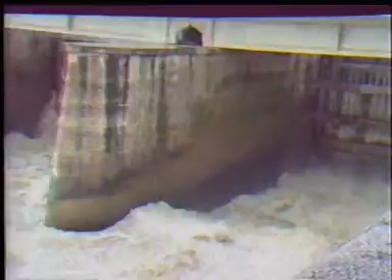Friends, today we are going to deal with the effect of viscosity on fluid flow, explain the basic concepts of laminar flow, turbulent flow, critical velocity, and Reynolds number, and its application in fluid flow problems.

All fluids existing in nature, both gases and liquids, are viscous and compressible. In the 18th century, scientists sought to specify the motion of fluids by mathematical relations. These relations could be developed only after certain simplifying assumptions were made. The fluid was assumed to be non-viscous and incompressible. Such a fluid, which in addition had no surface tension, was called an ideal fluid.

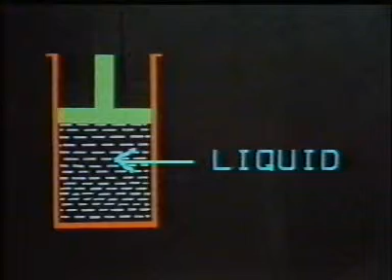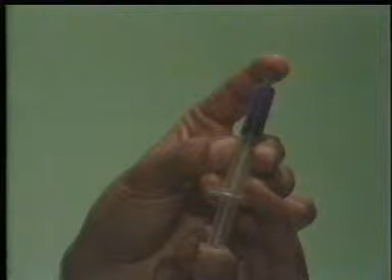Generally, liquids are said to be viscous but incompressible, whereas gases are said to be compressible, having low viscosity. For example, water is incompressible, but air is compressible. Viscosity causes shear stresses in moving fluids and hence loss of energy. All real fluids resist any force tending to cause one layer to move over another. This resistance to the movement of one layer of fluid over an adjacent one is due to the viscous nature of the fluid.

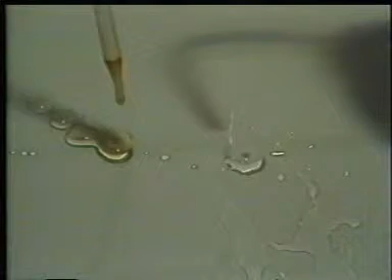Viscosity is therefore defined as the property of fluids by virtue of which fluids resist relative motion between adjacent layers. Without viscosity of fluid, there is no fluid resistance. Viscosity is greatly affected by temperature. Viscosity of liquids decreases with temperature, while that of gases increases with temperature. Consider this oil and water. The oil is more viscous than water.

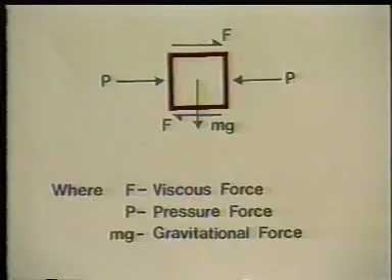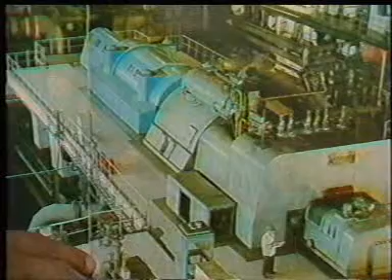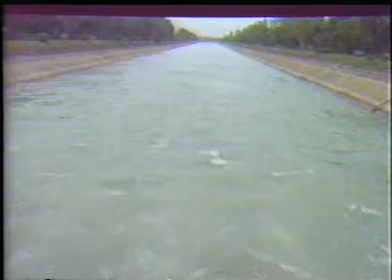A fluid particle in motion is subjected to viscous force, pressure force, and gravitational force. Viscous forces play an important part in many fluid flow problems, such as flow in conduits, flow through porous media, the problem of lubrication, design of turbines, water distribution systems, pipe network in chemical industry, irrigation canals, aircrafts, missiles, etc.

Till the middle of the 19th century, scientists and engineers obtained much information about the flow in pipes and open channels through observation and experimentation. This information was entirely empirical because practically nothing was then known about the laws governing the influence of viscosity. Osborne Reynolds was the first to introduce viscosity as one of the parameters in the analysis of fluid flow.

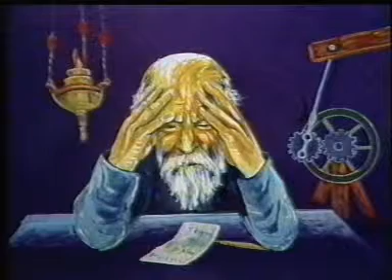Osborne Reynolds, 1842 to 1912, came of a clerical family in Belfast, and after workshop experience studied mathematics at Cambridge, where he graduated with honors. In 1868, he was appointed to the new chair of engineering at Owens College, which later became Victoria University in Manchester. He was elected a Fellow of the Royal Society in 1877, and he remained active at Manchester until his retirement due to failing health.

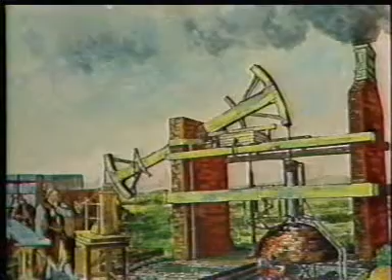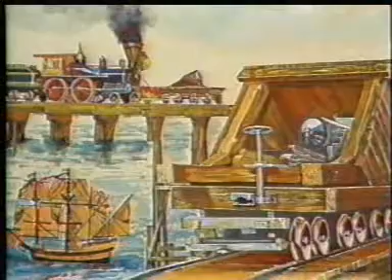Reynolds' interests were manifold, from problems in mechanics, thermodynamics and electricity, to problems in navigation, rolling friction, and steam engine performance. Reynolds' approach to the solution of problems was primarily that of an engineer.

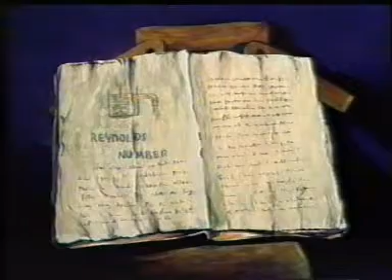While the existence of two types of flow, called laminar flow and turbulent flow, was known before Reynolds, he was the first to publish a paper in 1883 formulating a parameter to take into account the effect of viscosity. This parameter now bears his name and is called Reynolds number.

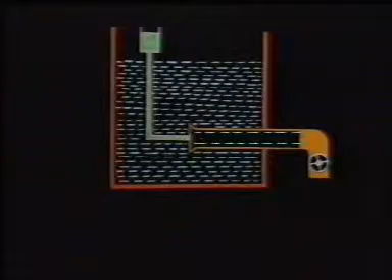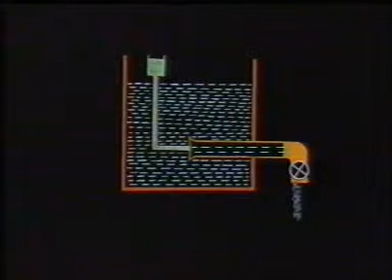The apparatus used by Reynolds for conducting experiments was basically as shown. Water from the tank could flow out along the glass tube at a rate controlled by a valve at the outlet end. A fine nozzle connected to a small container of a liquid dye is used to discharge a colored filament in the flowing liquid. If the velocity of water remained low, the filament of dye would pass down the tube without mixing with water. Such a flow was called laminar flow.

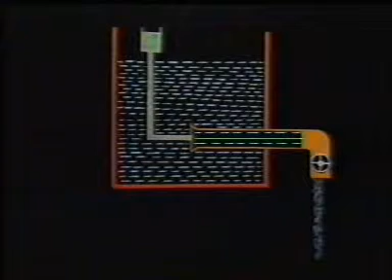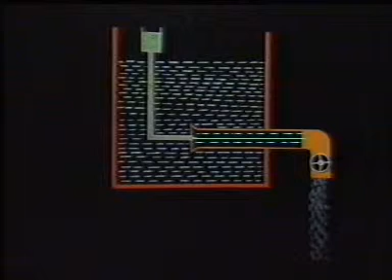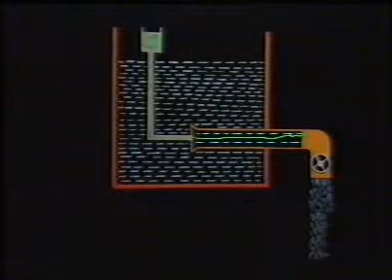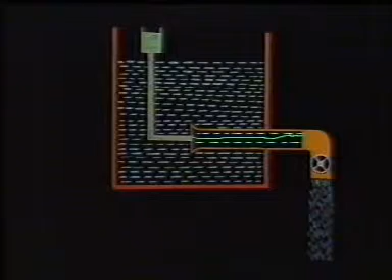As the velocity of water increased, this type of flow would persist until the velocity reached a value at which the stream of dye began to waver. Further increase in velocity of water made the fluctuation in the stream of dye more intense, particularly towards the outlet end of the tube, until a state was reached in which the dye no longer traveled the whole length of tube as a distinct, unbroken thread, but quite suddenly mixed more or less completely with water in the tube. Such a flow was called turbulent flow.

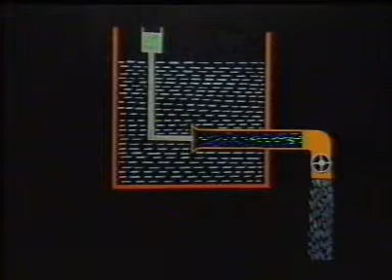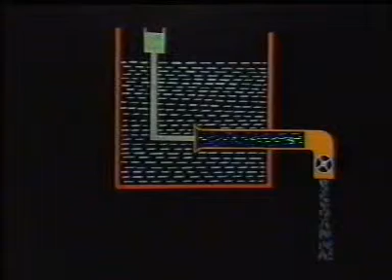Still further increase in velocity caused no alteration in the type of flow, but the dye mixed even more readily with water, and complete mixing was seen nearer the inlet end of the tube. Laminar flow, in which the dye remained as a distinct streak, could be restored by reducing the velocity. Although Reynolds used water in his original tests, subsequent experiments have shown that the phenomenon is exhibited by all fluids, gases as well as liquids. Moreover, these two types of flow can be found in all situations and are not confined to circular tubes alone.

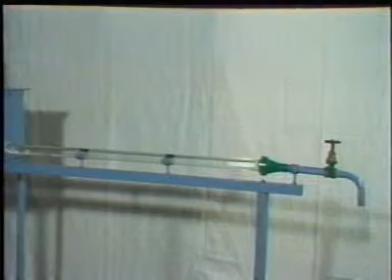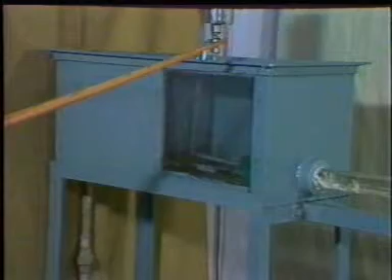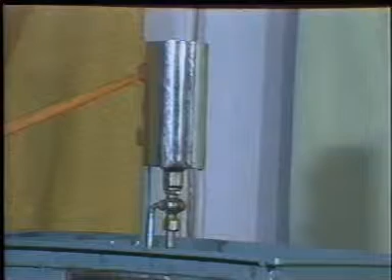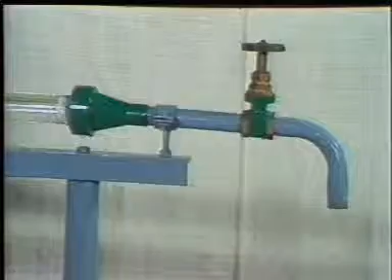Now, let's go to the hydraulics laboratory to demonstrate Reynolds' experiment. This apparatus is similar to the one used by Reynolds in his experiments. This is the tank containing water. The baffle plates reduce any disturbance in the water. This is the dye container, which injects a fine jet into the stream at the bell-mouthed entrance. The flow in the long glass tube is controlled by the outlet valve. To measure the discharge, from which velocity is computed, a measuring tank is used.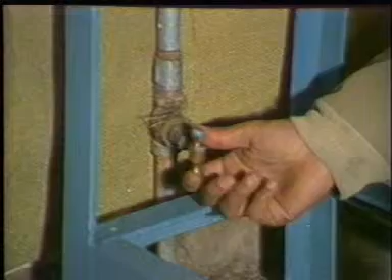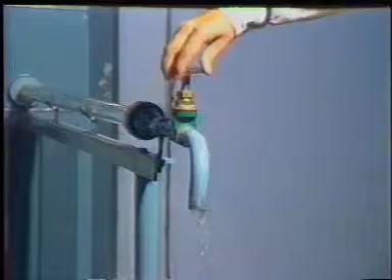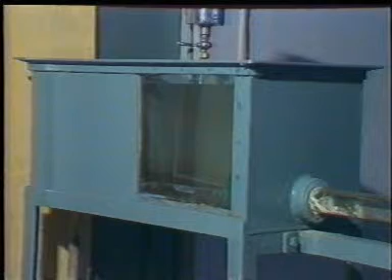The main supply valve is opened and the tank is filled with water, with the outlet of the glass tube partly open so that no air is entrapped in the glass tube. The outlet valve of the glass tube and the inlet valve of the tank are closed when the tank is full of water. Now, we wait for some time to allow water in the tank and the glass tube to come to rest.

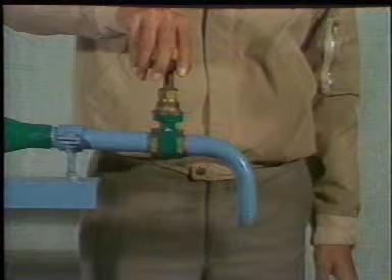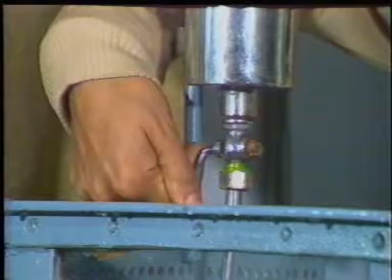Now open the outlet valve of the glass tube so that the velocity of flow is very small. Also open the dye injector so that the dye is admitted into the bell-mouthed entrance of the glass tube. We find that the dye appears as a straight line extending through the glass tube. This type of flow, in which fluid particles move in an orderly fashion, is called laminar flow or viscous flow

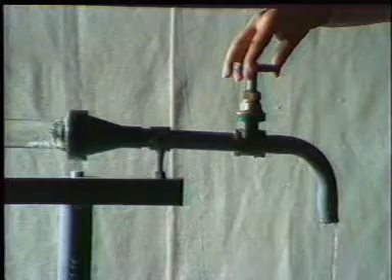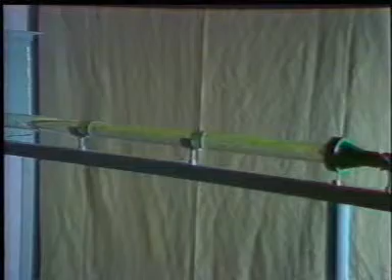or straight line flow. Let's increase the velocity of flow with the help of the regulating valve. We find that the liquid continues to flow in laminae until the velocity of flow reaches a value at which the stream of dye begins to waver towards the outlet end of the glass tube. Further increase in velocity of water increases the fluctuations in the stream of dye until the stream of dye gets mixed up completely with water in the tube. Still further increase in velocity of flow does not cause alteration in the type of flow.

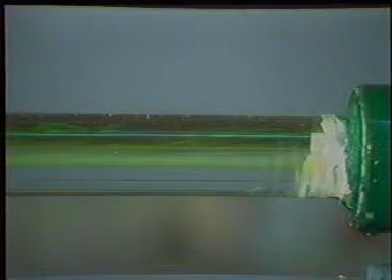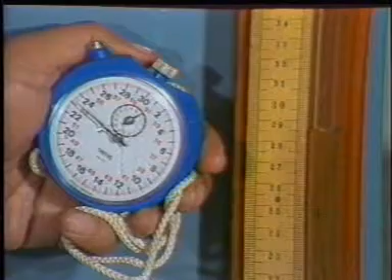In this type of flow, the paths of individual particles of fluid are no longer straight everywhere, but are sinuous, intertwining, and crossing each other in a disorderly manner, so that a thorough mixing of fluid takes place, and such a flow is called turbulent flow. Let us calculate the velocity of flow. Now, let us decrease the velocity of flow in the glass tube till the stream of dye is again visible in the glass tube.

We find that the velocity at which the change from laminar flow to turbulent flow occurs is higher than that which caused the change from turbulent to laminar flow. Reynolds called these velocities respectively the higher and lower critical velocities. Reynolds also found that the nature of flow, that is, whether laminar or turbulent, and its relative position along a scale, indicating the relative importance of turbulent to laminar tendencies, was indicated by a dimensionless parameter which is called Reynolds number.

This dimensionless parameter is given by: Reynolds number is equal to rho L V over mu, where rho is the mean density of fluid, L is a characteristic dimension of the stream. For example, in this case, L is the inside diameter of the pipe. V is the velocity of flow, and mu is the coefficient of dynamic viscosity of fluid.

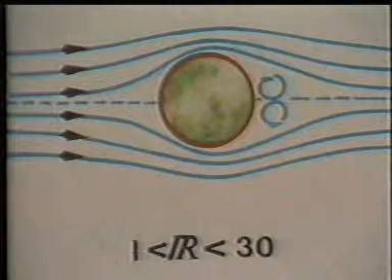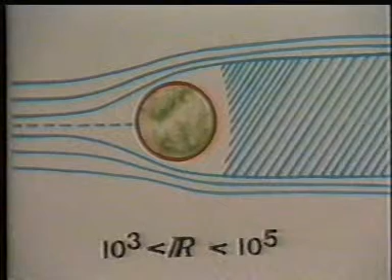Under ordinary conditions, transition from laminar flow to turbulent flow takes place for Reynolds number 2000 to 3000, and for Reynolds number greater than 3000, the flow will be turbulent. More recently, however, it has been proved that the magnitude of Reynolds number at which laminar flow becomes unstable depends largely upon the nature of disturbance present in the flow. For example, critical values of Reynolds number over 40,000 have since been reached with Reynolds' original equipment, largely as a result of increasing the stilling time, improving the rounding of the inlet, and eliminating all possible vibrations.

Thus, the maximum value of Reynolds number at which laminar flow is physically possible appears to be indeterminate, the disturbance necessary to produce instability simply decreasing in magnitude as Reynolds number becomes larger. For most industrial applications, the critical Reynolds number lies between 2000 to 2300. Reynolds number is applicable for all flow conditions, laminar or turbulent, where the viscous nature of fluid is considered.

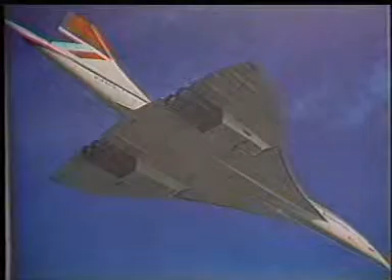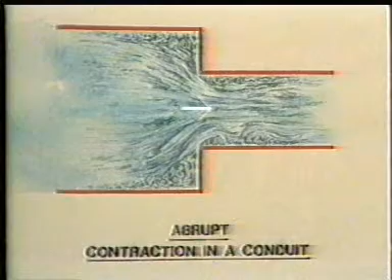Reynolds number is the principal parameter determining the nature of flow when studying the motion of bodies in a fluid of large extent or flow of fluid around such bodies. It helps in the study of forces on tall buildings, telegraph poles, etc., due to high velocity of wind, problems of motions of automobiles, aeroplanes, submarines, problems of separation, eddy formation, and lateral mixing in flow through abrupt contractions,

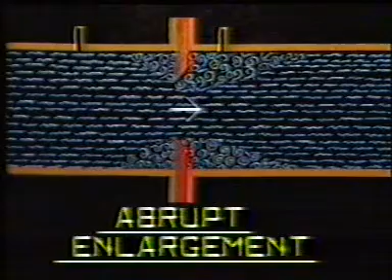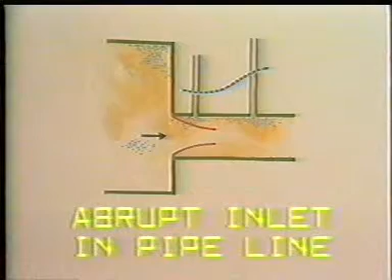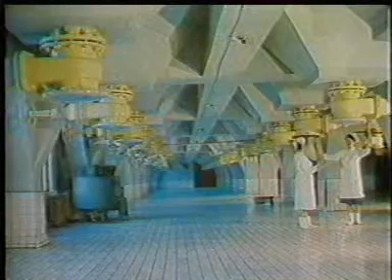abrupt enlargements, abrupt inlets in pipelines, and also due to abrupt obstruction in flow; settlement of solids in a liquid, problems of heat transfer, problems of sediment transport in rivers, etc., loss of head in pipelines, and problems of lubrication of machines.

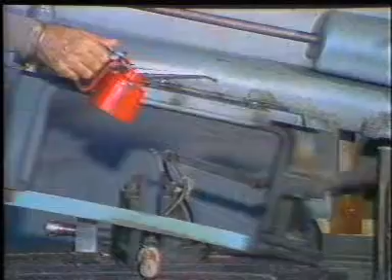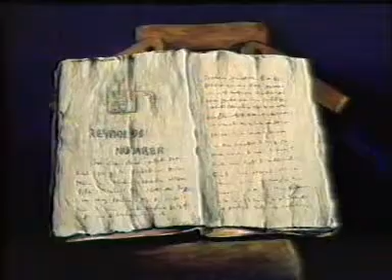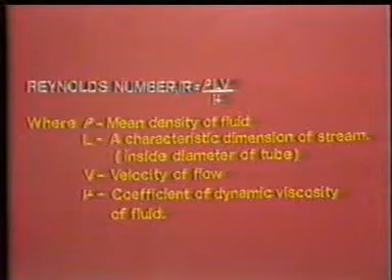Thus, to summarize, viscosity is one of the very important factors affecting the flow of fluids. It is the property of fluids by virtue of which fluids resist relative motion between adjacent layers. Osborne Reynolds formulated a parameter, now called Reynolds number, to take into account the effect of viscosity. Reynolds number is a dimensionless parameter and can be seen to be the ratio of inertial forces causing flow to viscous forces resisting flow, and is given by rho into L into V divided by mu.

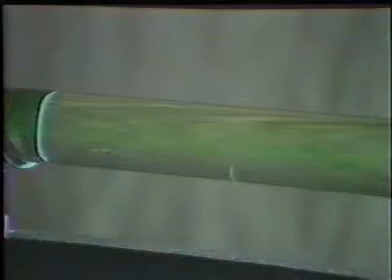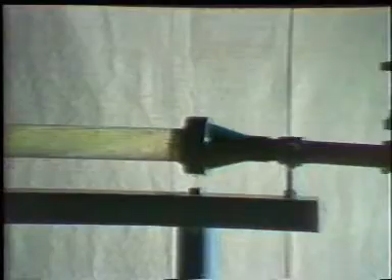Whether the flow is laminar or turbulent is determined by the value of Reynolds number. At higher values of Reynolds number, the inertial forces overcome viscous forces and the flow is turbulent. But at lower values of Reynolds number, viscous forces predominate and the flow is laminar. For Reynolds number less than 2000, the flow is always laminar. Transition from laminar flow to turbulent flow takes place for Reynolds number 2000 to 3000. For Reynolds number greater than 3000, the flow will be turbulent. This upper critical value of Reynolds number depends largely on the nature of disturbance present in the flow.

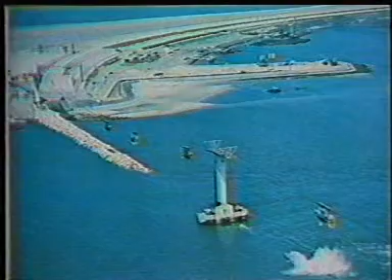Reynolds number is an important parameter used in the analysis of fluid flow problems such as flow in conduits, flow through porous media, design of automobiles, aircraft, missiles, harbors, turbines, water distribution systems, and irrigation canals.